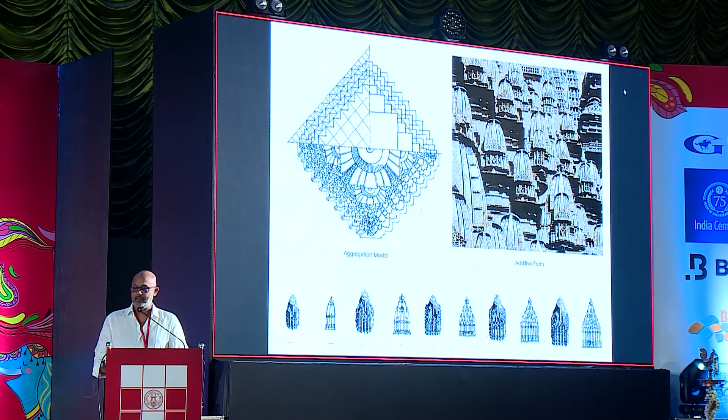So the plan of a Hindu temple has a kind of fractal nature, where depending on the aspirations of the patron, the Sompuras, the traditional architects, knew how to regulate geometry through scalar repetition to create grand monuments. Ours, of course, is significantly humbler.

Within our project as well, we saw a move from a family of around 9 blocks to around 13 blocks. We even had versions with 16 and maybe around 19 blocks, but we finally settled on the actual 13 block plan.

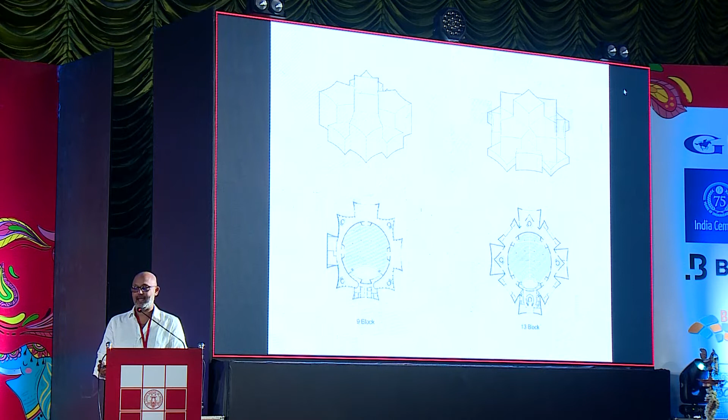As you can see in the actual design, what you have is this family of forms where these gently curved marble-clad volumes finally terminate on this kind of lantern at the top, which has one of the meditation halls there. The plan itself, as you can see, is almost mandala-like.

Unfortunately the lines aren't very clear, but the circle in the center is about 60 meters in diameter, and that is the main meditation space, which can house about 5,000 people, with one balcony. Along the cardinal directions is where you have the primary entrances, along the northwest, northeast, southwest, southeast corners, and you end up with this formation, which is absolutely clear in the plan of the ground floor.

So that really becomes, in a certain sense, the seat of the entire building. Now, how do we span 60 meters? This is where we had a very interesting structural solution, with 4 intersecting arches. These arches intersect in a way where they actually cut the span, but the square formed in the center is what the lantern is actually supported on.

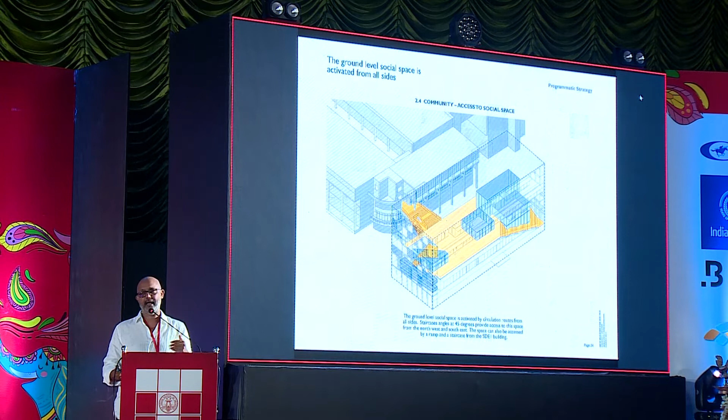So this idea that you could actually have spaces where students could have chance meetings amongst themselves, with basically faculty. So we created a large social platform, which we call the living room of the house. This is really where students arrive before they move up and down to their classrooms, and that is this kind of large community space.

We've also got these curtains that can be drawn every time you have a lot of rain, so that you have some rain protection. This is the array that we have of the photovoltaics on the entire ceiling.

And you can see how we've taken those staircases and actually carved them back into the hill to lead you up to the highermost level. So this, as you can see, is the entire elevation.

So we have an enormous amount of glass, but thanks to the large oversailing roof, it provides enough cuts away direct light, but allows enough light into the classrooms, which we also have by the actual fins that we have above on all of the elevations. So you get all the light you need, but you get no glare. And it's a very, very pleasant space to actually be in.

So the crit space is another interesting room because it actually drops down from the ceiling, and that's where students make their presentations. In a certain sense, that's kind of something which is normally behind closed doors or shut away, but here it becomes a visible part of the architecture of the building itself.

Also, across all of the 5 years, the students from the first to the 5th year share one common studio. Again, the idea that you can have this kind of space of peer-to-peer learning, which essentially promotes a lot more cross-collaboration between various faculties and the students themselves.

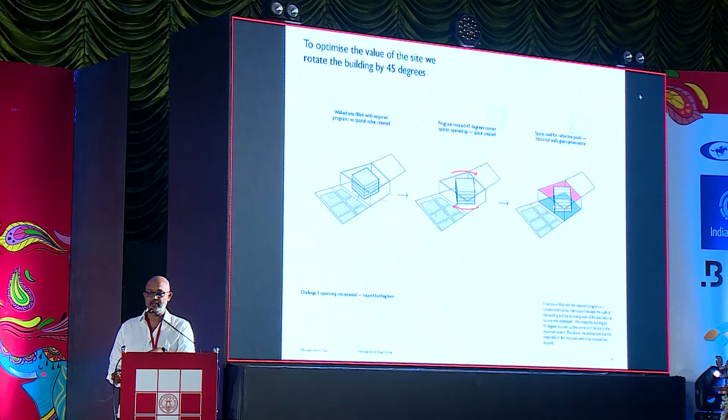Fundamentally, just a couple of very simple strategies. One was we placed the entire program as a cube within the actual walled space, and we rotated it 45 degrees. That simple rotation created a series of pools, and that's how we treated the ground, as reflective pools to create cool, contemplative spaces at the lowest level.

This lowest level is really accessible largely only to the restoration teams and the conservationists, so just these very contemplative spaces behind these large walls.

But the other big move was to open up a path from the highest level at the terrace all the way down to the garden, which is almost a drop of about 12 meters. So we sliced the actual staircase on a diagonal across the entire cuboid, drawing on the history of all the stepped wells you see in this region and in Gujarat as well.

What you end up with is this visual connection between the pavilion at the upper level and the garden at the lower level. You get this very simple plan, but it also creates this nice viewing deck, which people can walk out or walk up onto and enjoy the views of the garden and all the surrounds.

This is that staircase, as you can see. It's almost like walking through one of those narrow streets in Rajasthan, but this time you have these large windows, which give people a visual connection to all the activities happening within the knowledge center. Again, this just shows you the resolution of the entire ground plane.

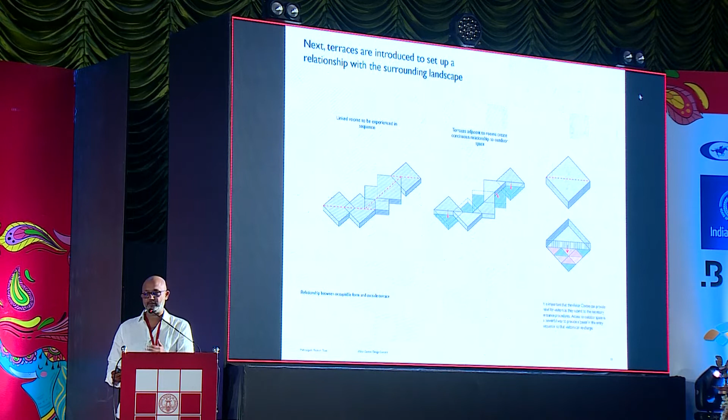This notion of room-to-room movement is again something we've always seen in traditional architecture in India. And in a certain sense, you begin to slice away parts of the program that you don't need, to create these terraced gardens.

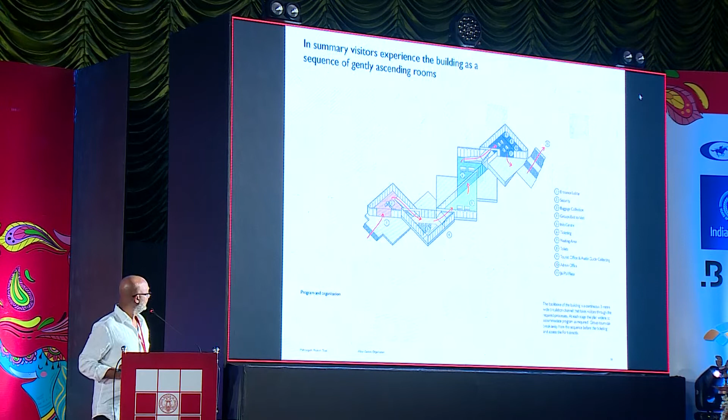And then the cascading of the building itself allows people to move from one level to the next. So by simply moving the program, or rather every volume, by a meter or so, we managed to create a sequence of movement. You have this sequence of rooms, these gently ascending pavilions, which finally bring you up all the way to Jaipur Plaza, where you get this phenomenal view again of the city all around.

So here you essentially have a kind of architecture that is very innocuous, that makes movement through all the various stages of the visitor center until you come up to the entrance. Again, this idea that you work with geometry, you work with the deep structure of certain types at your disposal, but you can do something contextually relevant in terms of material. But the architecture, in a certain sense, still stands apart.

This next project has unfortunately been under construction for almost 8 years. It's been stalled for about 3 years, but it's still a very exciting one. This was when we were called in to build a hotel - not very large, around 32 rooms on a 60-acre parcel on this absolutely incredibly beautiful site on coastal Maharashtra.

And it almost seemed like a shame to build anything that would destroy, in a sense, this very natural landscape. If you look at a typical hotel model, it's either a hub and spoke arrangement with a main restaurant or main hotel room, and then cottages dotted into the landscape, or you have one large building with corridors leading to rooms. We didn't want to use either of these.

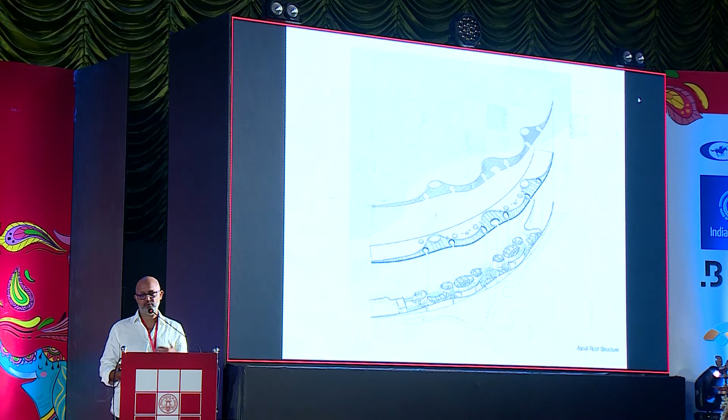And the roof was a real challenge because we of course wanted to build it all in concrete, but it's in an incredibly exposed location. And the monsoons, the brunt of the monsoons on the southwest, which is the back, would just be intense. We were almost sure that the concrete would leak.

So we finally went ahead with essentially zinc on the main sinusoidal curve, which we felt was the one that was most exposed. So these are some of the images of the project where it is right now.

And inshallah, sometime next year they will finish this project. This is, of course, on the seaside. Again, just views of this building as it kind of hugs the ground. These large voids, where you have the pools, etc.

This is the other large project that was recently finished in 2020, the new subordinate courthouse complex in Singapore. It's a project that we won in competition in 2011. Just some of the earlier renderings.

What was very interesting over here, of course, is that the entire program is almost about 150,000 square meters. And how does one begin to design a vertical courthouse? A typical courthouse would be a horizontal, a kind of ground straddling organization.

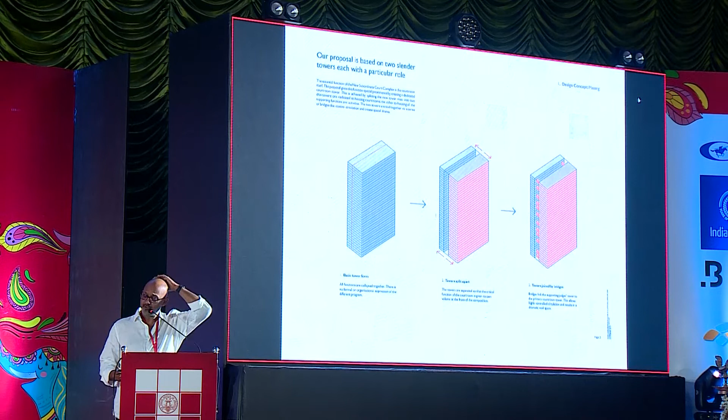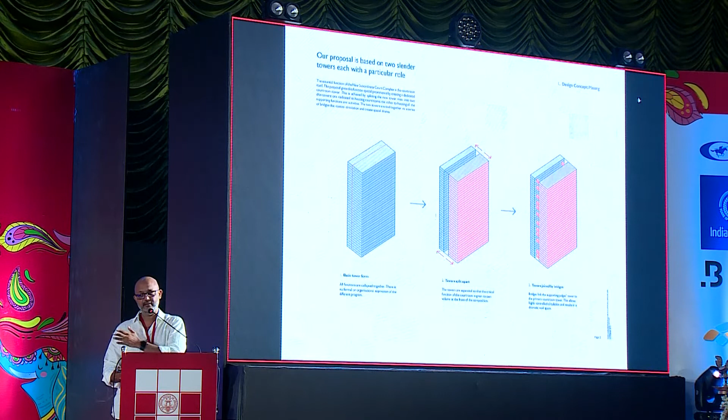So essentially what we did was, rather than a single tower, we split the building into two towers. The blue mass is where all the offices of the judges are, and the pink mass is where we have all the courtrooms. And the two are connected by a series of bridges. These bridges allow the actual judges to walk directly into their courtrooms.

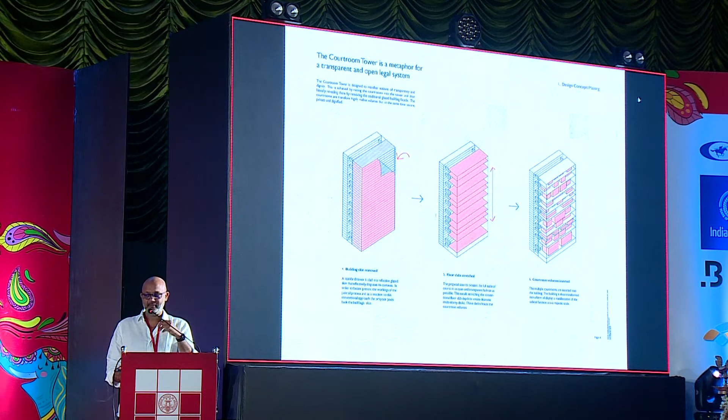And in a certain sense, being conscious of this fact that the government was, of course, interested in minimizing energy demand on a project that large, we actually stripped away the elevation. The transparency of the building, almost a metaphor for the judicial system. The pink boxes, of course, would be air conditioned, but everything else would not.

And again, it draws from the idea of these actual terracotta roofs, and that is what all of the courtrooms are clad in. This kind of customized terracotta panels that we designed to kind of animate the facades of the building. So every floor itself, this idea of a shared collective platform rather than rooms being placed cheek and jowl, to kind of open up the spaces between them. You have this beautiful expression of the actual terracotta on the outside.

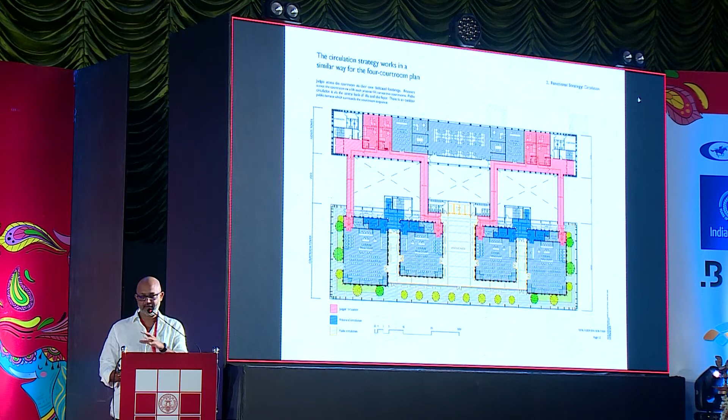Going to court is not a pleasant experience for anyone. So if you could have a little bit of greenery and openness and a place to rest, that's really what we wanted to do, to create these kind of urban gardens, so to speak, at all of these different levels.

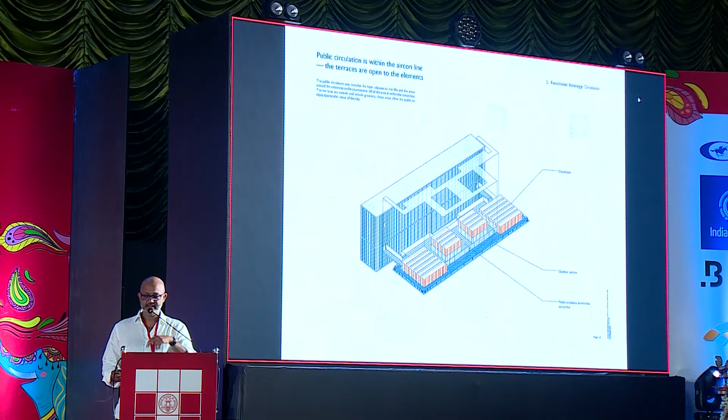Here you can see the connections between the two towers. The entire rear tower is very simple, just a simple grid which expands and contracts depending on the program at the back, whether it's services or not. Structurally, these two towers work extremely well together because they actually support one another. This also shows where the air conditioning line is, the bits that are air conditioned and the bits that are not.

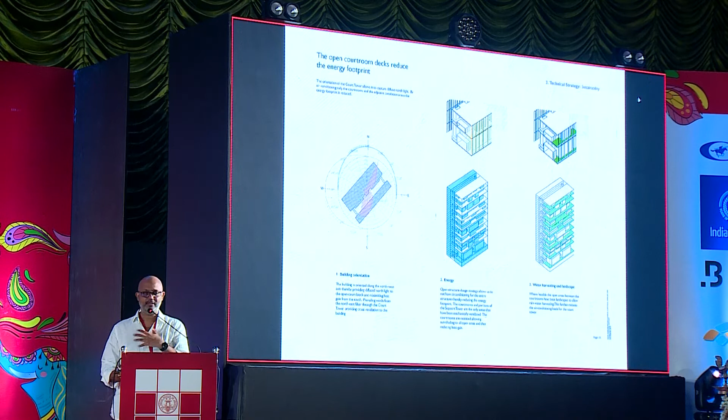These are the large foyers which you walk into on every floor. We did an audit of the actual energy footprint, and looked at water harvesting on the platforms, because you get a lot of rain coming in. So rather than that just being drained away, we collected it and brought it back into the primary water system.

This was our first luxury residential project in Bombay. This client came to us with a very small plot on a very, very prime location, essentially Carmichael Road, probably one of the old Art Deco precincts in Bombay. While the houses are all listed, this particular site was not, so with much trepidation we agreed to build a 15-story tower in a predominantly low-rise, historically important, relevant site within Bombay.

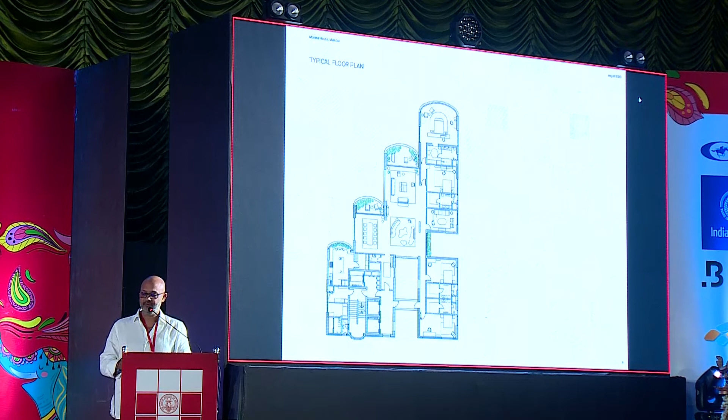We have the amenity floor with all the shared facilities including the pool. But what's interesting is the floor plan itself — these four bars are staggered outward, taking on the shape of the site below. As you enter, you have large voids which allow the movement of air through the plan and the penetration of light, so although it's a fairly deep plan, there's an immense amount of light.

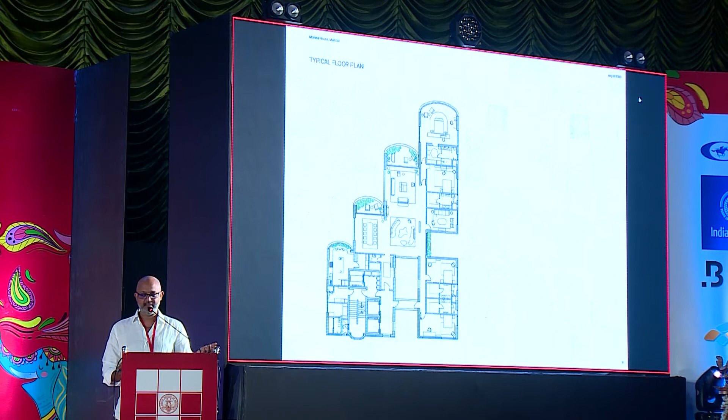I think that's what really feels nice, especially with the large balconies we have for the living room as well as the dining room. In a certain sense, it's just like Bombay high life, to enjoy those moments that the actual plan offers you.

What's also interesting is that we brought back the chhaja, or overhang, which was a pervasive piece of colonial architecture that you see everywhere. The lowly chhaja was reimagined as this beautiful articulated aluminum screen that hangs over all the roofs, because in India, nothing works better to keep the rain and glare out than a chhaja. That became one of the key elements in the building, all in charcoal aluminum, while the entire building is clad in glazed ceramic.

One reason for this is that buildings in Bombay don't age well, simply because of the moisture, dampness, rain, and monsoon. So we have this beautiful glazed ceramic on the entire building, and every monsoon, the building just cleans itself, it all washes off.

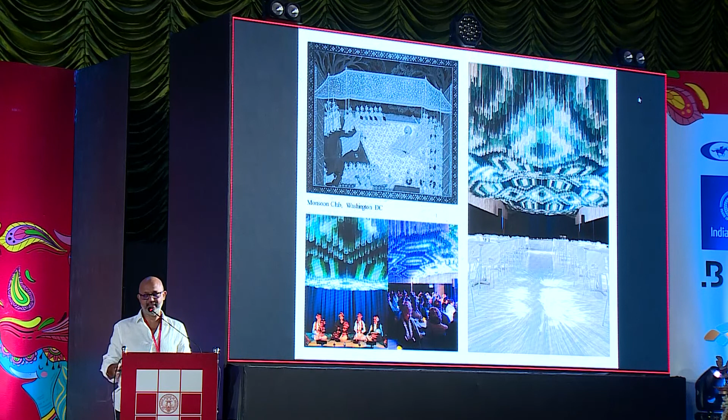And of course, it was only up for about 3 weeks, and then it was all taken down. So, yeah, okay, thank you.